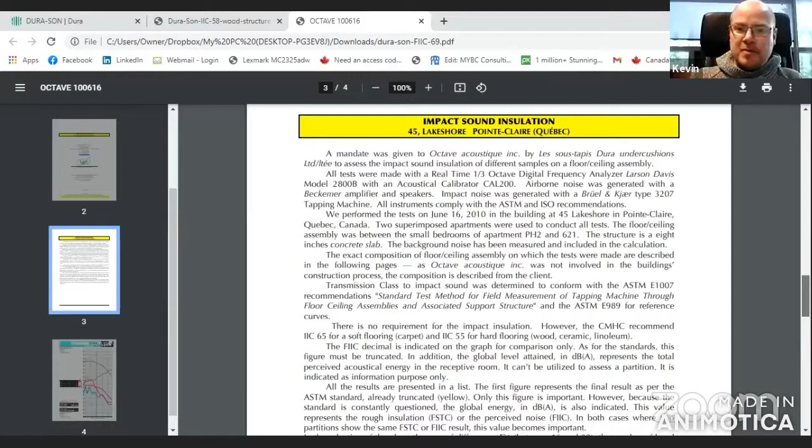So let's just go over, because I think we might spend some time today on concrete, because when I was on their website, and from the last time that I was dealing with this, there weren't really the ratings for plywood substrate. So I found the technical data sheet for plywood as well. So let's just go into this first of all: what is impact sound insulation? What does that mean? Yep. So that is the famous IIC number, impact insulation classification. And that is one of the two primary numbers that your typical strata council in Vancouver, the Lower Mainland, is going to request. And it used to be the only one that they requested, which, as we'll find out in a second, made more sense. But we've now moved on to STC ratings, which is what we'll probably cover next.

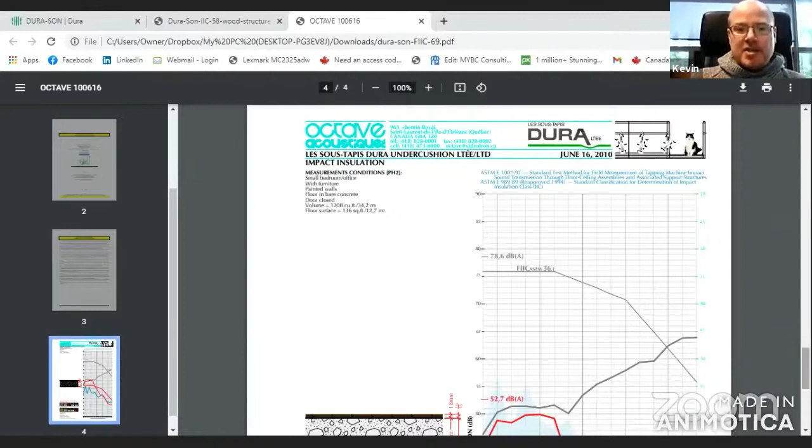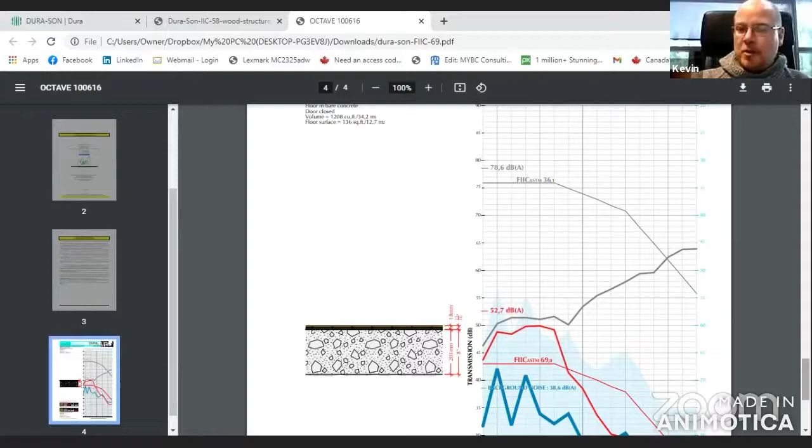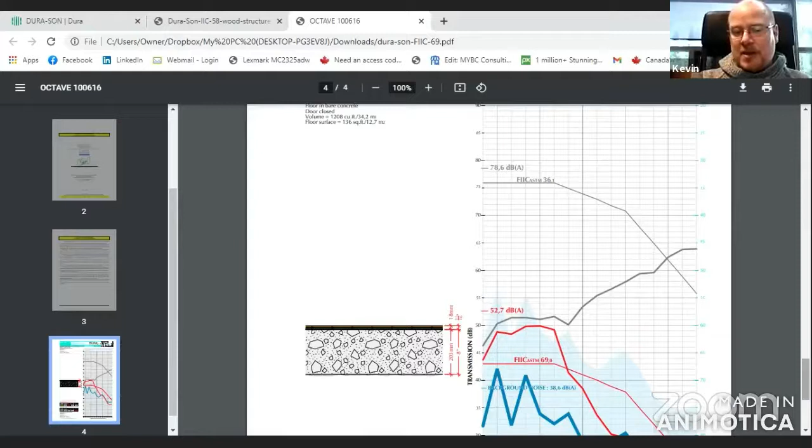But IIC, impact insulation classification, is exactly as it sounds. It's measuring the noise or the impact of, we're mimicking a foot landing on the finished floor covering above, and how much of that noise is being transmitted to, in this case, the microphone or the recording device below. And we're trying to measure what the difference is when we, let's say, add an acoustical layer like Dura-son. So it's not a delta difference, which is a difference between two measurements. It's not a relative difference. It's just an absolute number. What is the rating after this product has been put underneath the floor covering, with such and such a type of testing assembly. So as you can see, it gets quite complicated. So I'm trying on the fly to make it as practical and intelligible as possible. So I hope that made sense.

Okay. Yeah, so we have this chart. It says, okay, you guys install a lot of oak engineered hardwood flooring that's 14 millimeters thick. The Dura-son is 3.5 millimeters thick. It's great, we're not talking inches and centimeters at the same time, we're all talking about millimeters. So there's the FIIC rating, 69. Is that the delta rating? No, there's your delta. The delta is the little triangle there. So you have a delta N, which I'm not sure if that means average, and then there's a delta max.

So that would be the difference before and after, which is actually in reality what you're trying to understand: what's the difference. We test this, let's say, with a hardwood floor. We achieve a sound rating, and then we test it again with Dura-son underneath the hardwood floor, and what's the sound rating? So that would be the delta, or the difference.

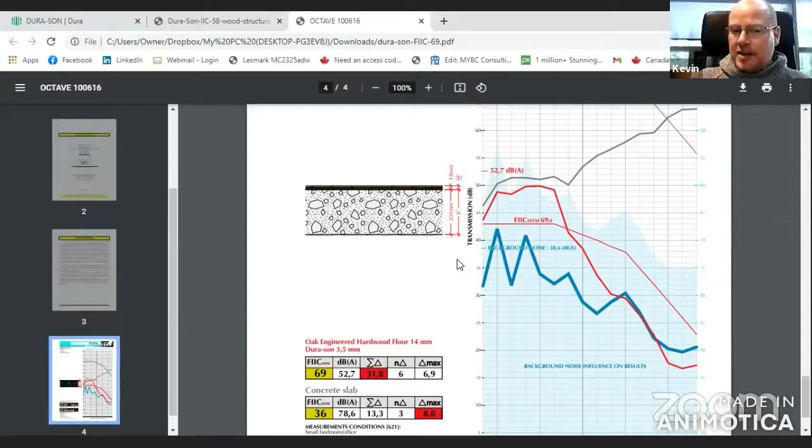Well, that's arguably the predominant factor in what number is going to be achieved, not so much what thickness or type of flooring underlay is being installed. This becomes readily apparent when we look at some of the vinyl plank underlays that are 1.5 millimeters thick of actual foam. If we look at this assembly with an 8-inch slab, is that slab gonna do most of the sound abatement, or is it the 1.5 millimeters of vinyl floor underlay that we are supposedly testing? I would argue that it's obviously the thickness and density of the slab.

And to a more extreme extent, in some of the lab testing, they'll have this assembly with an 8-inch slab, then they'll also mock up a drop ceiling or suspended ceiling below that slab. They will stuff it with insulation, with batting, and then put the microphone underneath. And they'll say that this underlay achieved an IIC of this extremely high number, right? Right.

So it's common sense to look at that type of testing assembly and say, is it the 8-inch concrete and the 6-inch drop ceiling and the 6 inches of insulation that is achieving the noise abatement, or is it 1.5 millimeters of flooring underlay? Common sense tells you what's actually going on in a scenario like that.

So I see in the very tiny print down here, the measurement conditions: small bedroom, all these things to get the number. Small bedroom, it had furniture, which we know can absorb sound as well. Absolutely, yeah. Floor is bare concrete. The door was closed. The volume of the room was 1,208 cubic feet, and the ceiling surface was 136 square feet.

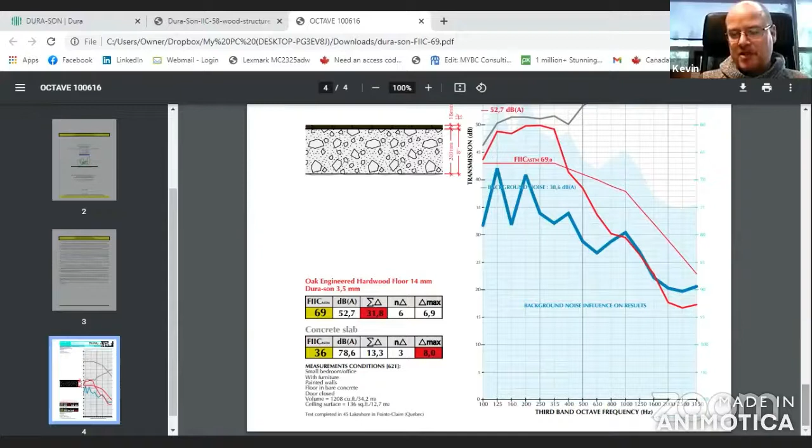So what did I also read? Yeah. Well, yeah. They also have a place I see there in the small print at the very bottom of where this test was conducted. So again, just further evidence that this is a proper engineered sound report of an actual real life scenario. And this is the ideal case, but the cost, obviously, for every building in the city to have a report done like this, it's just not the reality.

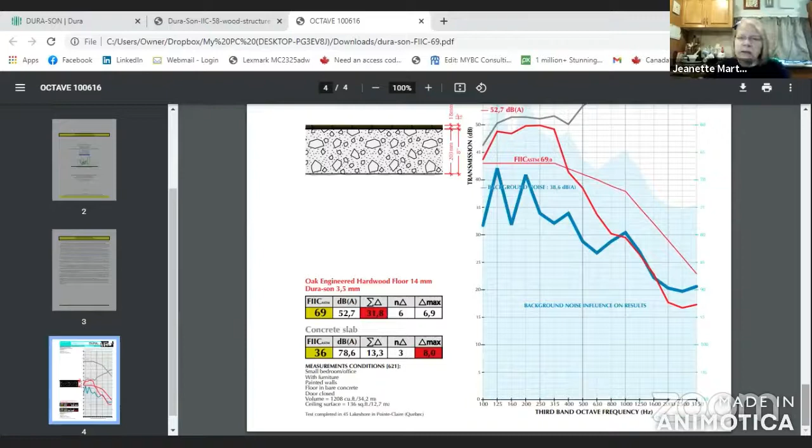It isn't. So do you have access to someone to be able to do testing if a strata wanted a real life test? Is there something like that available in Vancouver? Oh yeah, there are sound engineers in the city. Absolutely. Like I mentioned, my friend actually is a part owner of an engineering company, a sound engineer.

And I just recently met him through my kid's school, and we had an interesting conversation because I shared all the challenges that we have in the flooring industry, and he shared the same challenges that he has in the acoustic industry. And there's really a massive disconnect at the strata council level, which is where all of these specifications are being driven from. It's just lay people on the strata, who through no fault of their own don't understand the technicalities and the science behind acoustical ratings.

And both of us, but especially the flooring industry, are caught in a bit of a trap and a bit of a game that a lot of us don't want to be involved in. Yeah, when you just travel around Burnaby and Surrey, there's so many high rises. We don't have much land here in Vancouver. We can't go this way. We're going up. And it's so important that numbers aren't just thrown around willy-nilly, that something, pardon the pun, concretely is done in each individual building.

Here's just an idea. Next week, let's carry this conversation on to the plywood subfloor and how it will change up the acoustics. And if your friend wanted to be interviewed by me, I would love to learn from him and have him maybe join us next Wednesday for this open discussion, because there's nothing worse, guys, than when you build your own home, not a condo, and you've got your kids' bedrooms downstairs and the party's going on upstairs. You want to make your home as comfortable as possible for all different scenarios of entertaining and living as well.